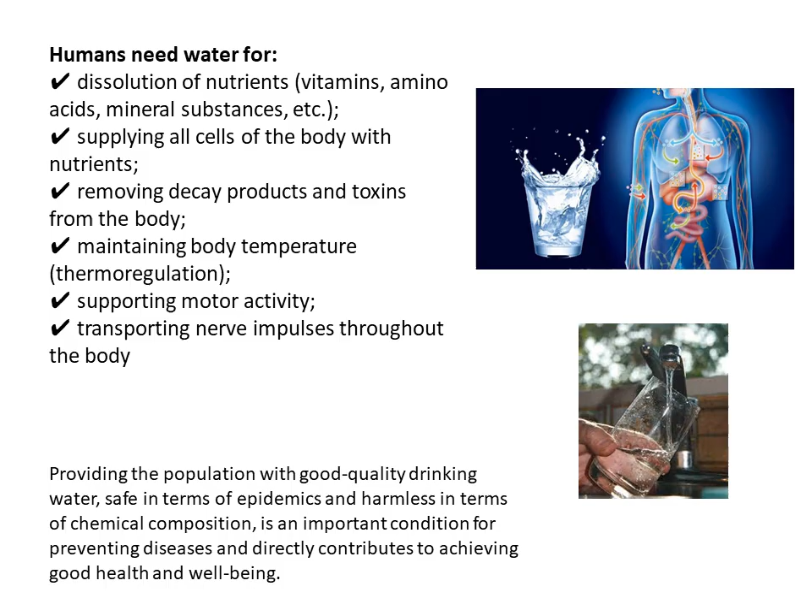Providing the population with good quality drinking water, safe in terms of epidemics and harmless in terms of chemical composition, is an important condition for preventing diseases and directly contributes to achieving good health and well-being. There are two types of water supply system, centralized and decentralized.

What does water supply mean? Water supply is a system of organizing the provision of water to the population, industrial, agricultural, and other facilities for various needs. It includes the processes of water abstraction, purification, transportation, and delivery to consumers. Depending on the water sources, water supply can be by centralized water system and decentralized.

Centralized water system means a system of pipes or other distribution devices designed to distribute potable water from treatment facilities to residential or commercial premises. The sources can be rivers, lakes, reservoirs, or wells. Decentralized water system uses local water sources like wells, artesian wells, local water intake facilities.

Centralized water systems use large plants and extensive pipes for big areas, offering economies of scale but high infrastructure cost and vulnerability. Decentralized systems use smaller local treatment units like point-of-use filters or small community plants near the user, providing flexibility, resilience, lower setup cost, and tailored solutions, but require more user involvement for maintenance.

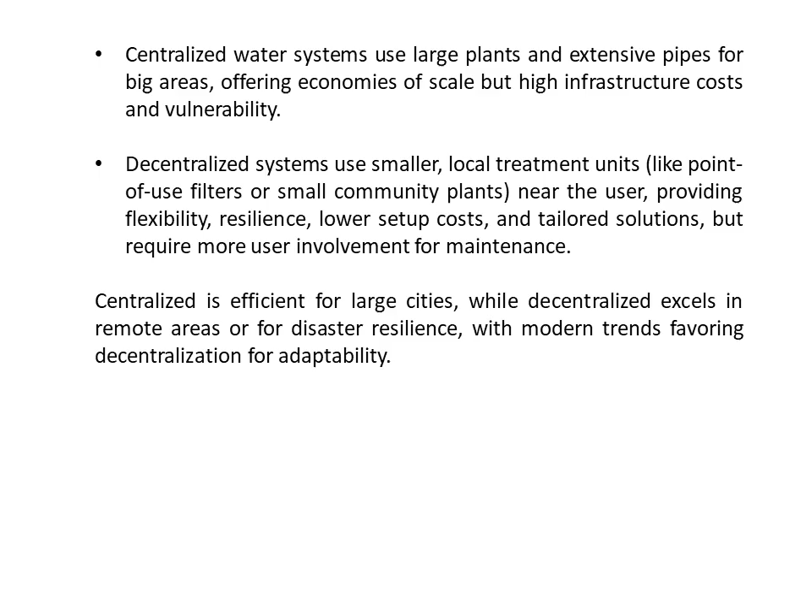Centralized is efficient for large cities, while decentralized excels in remote areas and offers disaster resilience, with the modern trend favoring decentralization for adaptability. Centralized, or by other name public water system or community water system, serves millions of households around the world. However, this system often does not reach the poorest or the most remote populations, and quality and quantity of water provided are often unreliable due to poor operation and maintenance.

Decentralized or private water systems offer the possibility to provide safe drinking water where centralized supply systems are not feasible due to technical, economical, or institutional reasons. For example, in rural communities or informal settlements. Decentralized water supply refers to the small-scale purification and distribution of water.

What about centralized water system? How does it work? A single large treatment plant collects water, purifies it, and distributes it via a vast network of pipes to a large population. There are some advantages of centralized water system. Economies of scale, that means lower cost per volume once built. Consistent quality across a large service area.

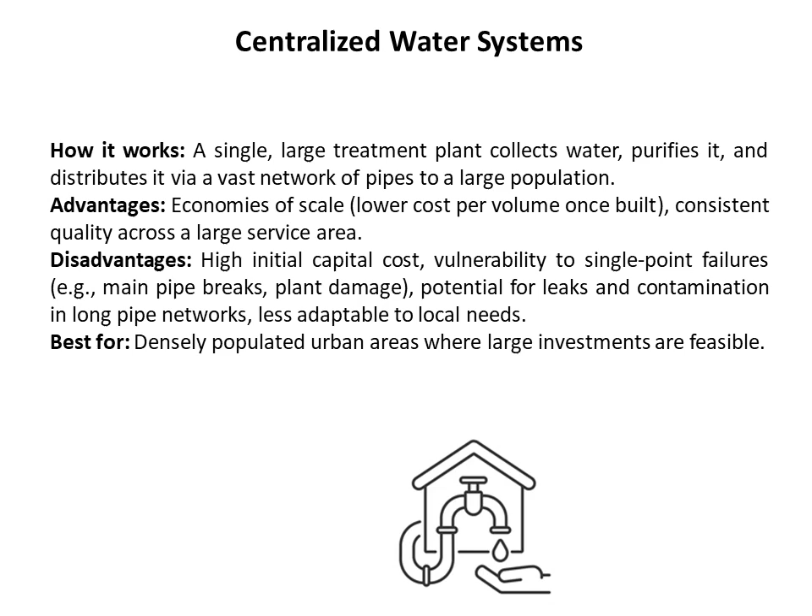But there are also some disadvantages like high initial capital cost, vulnerability to single point failures, potential for leaks and contamination in long pipe networks, and being less adaptable to local needs. It is best for densely populated urban areas where large investments are feasible.

What about decentralized water system? How does it work? Smaller, localized treatment units like point of entry, point of use or small community plants treat water close to where it's needed. Advantages of decentralized water system: lower initial cost, increased resilience, one unit failing doesn't affect the whole system, flexibility, suitability for remote areas, reduced need for extensive piping, and it enables local reuse.

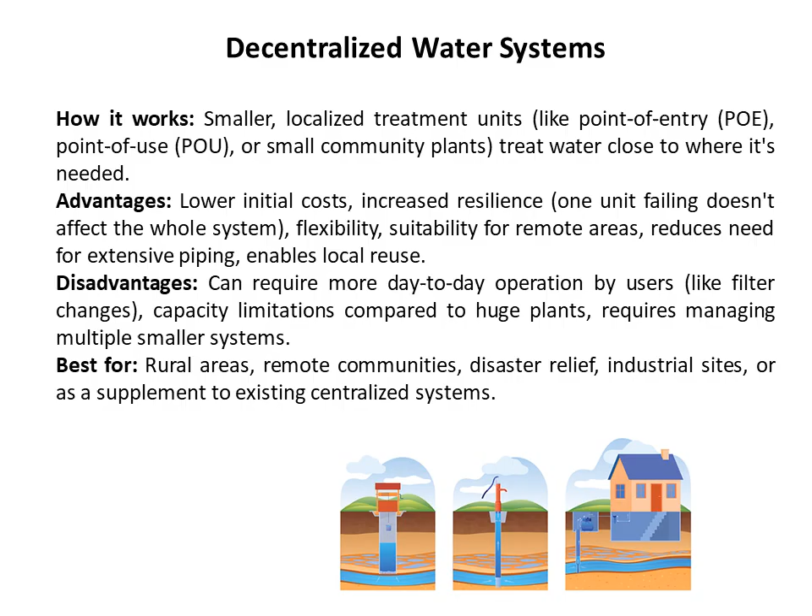Also, there are some disadvantages of decentralized water system. It can require more day-to-day operations by users, like filter changes, capacity limitations compared to huge plants, and requires managing multiple small systems. Best for rural areas, remote communities, disaster relief, industrial sites, or as a supplement to existing centralized systems.

Surface water refers to bodies of water that provide water to public drinking water supplies and private wells. These bodies of water can include rivers, streams, lakes, reservoirs, springs, and water under the ground. Groundwater is located below the surface of the earth in spaces between rock and soil. Surface water collects on the ground or in a stream, river, lake, reservoir, or ocean.

Surface water and groundwater are both important sources for community water supply needs. Groundwater is a common source for single homes and small towns, and rivers and lakes are the usual sources for large cities. Also, approximately 98% of liquid fresh water exists as groundwater, much of it occurs very deep. This makes pumping very expensive, preventing the full development and use of all groundwater resources.

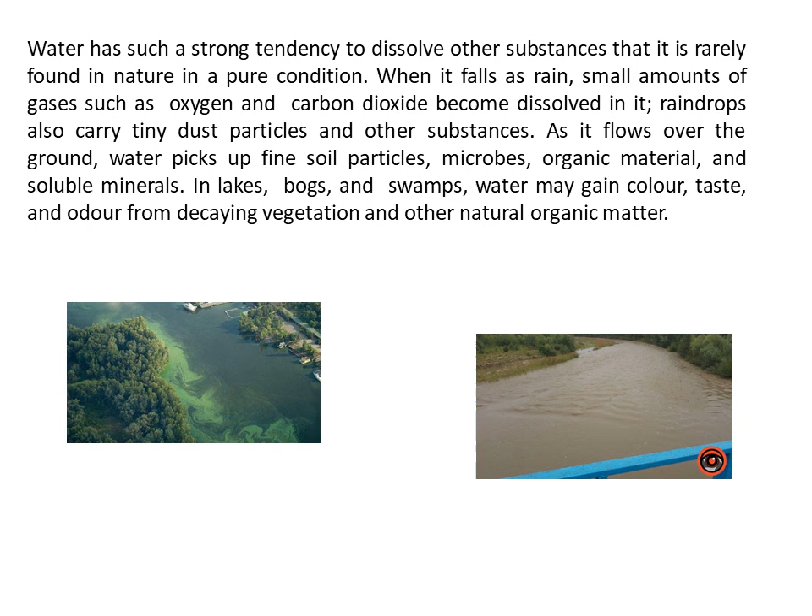In lakes, bogs, and swamps, water may gain color, taste, and odor from decaying vegetation and other natural organic matter. On this slide you can see how a local river or lake presents different pollution. Groundwater usually acquires more dissolved minerals than does surface runoff because of its long direct contact with the soil and rocks. It may also absorb gases such as hydrogen sulfide and methane.

In populated areas, the quality of surface water as well as groundwater is directly influenced by land use and by human activities. For example, storm water runoff contaminated with agricultural or lawn pesticides and fertilizers, as well as with road deicing chemicals or motor oils, can flow into streams and lakes. In addition, effluent from malfunctioning septic tanks and subsurface leaching fields can seep into groundwater.

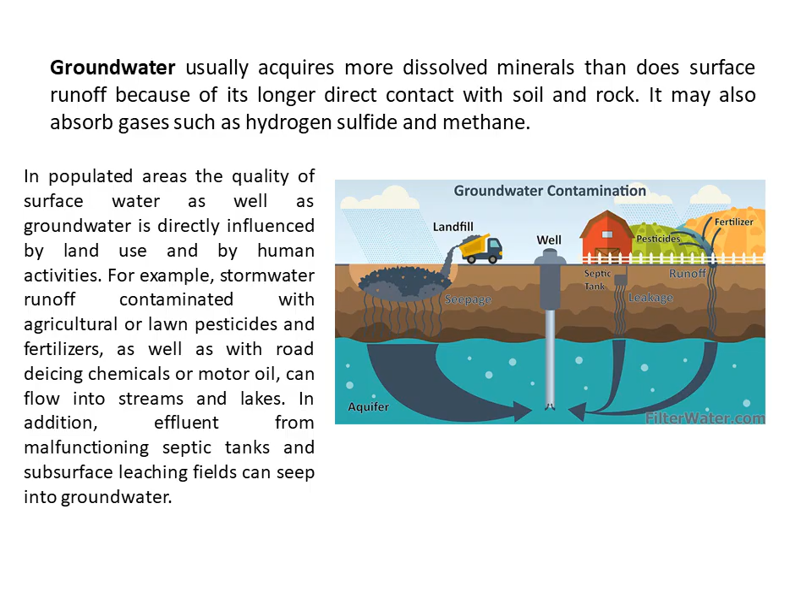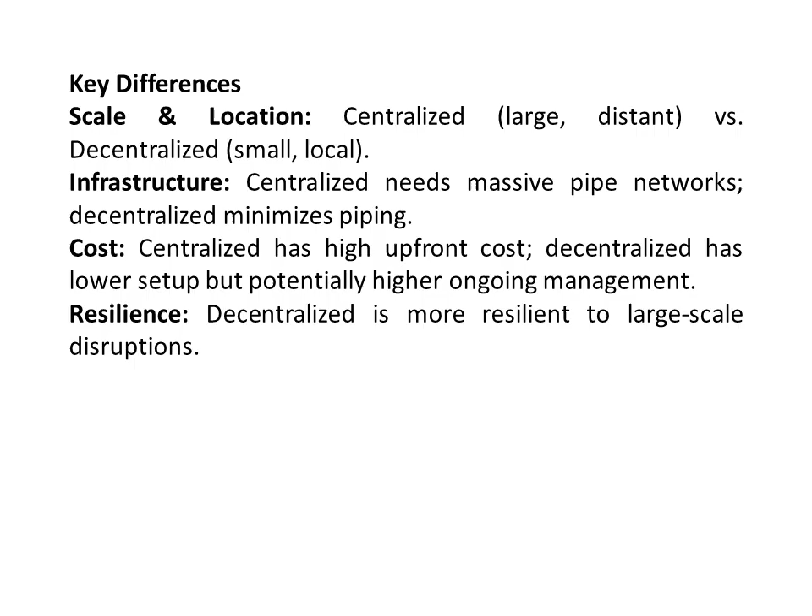Key differences: scale and location. Centralized, large, distant, vs. decentralized, small local. Infrastructure: centralized needs a massive pipe network, decentralized minimizes piping. A disadvantage of centralized is its high upfront cost. Decentralized has lower setup but potentially higher ongoing management. Resilience: decentralized is more resilient to large-scale disruptions.

Some groundwater needs filtration, which removes sediments and particles. Other groundwater needs aeration, which eliminates dissolved gases like hydrogen sulfide. Other water may need softening, which can reduce hardness caused by minerals like calcium and magnesium. All groundwater needs disinfection, which can kill bacteria and viruses by different methods with the help of chlorine, ultraviolet, or ozone. Sometimes water needs removal of arsenic, nitrates, or fluoride if present in excess amounts.

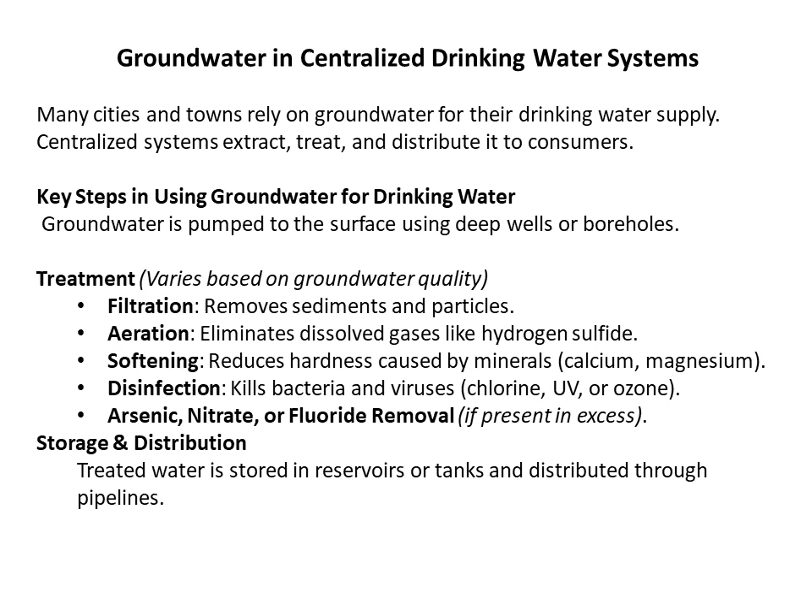Storage and distribution for groundwater are next. Treated water is stored in special reservoirs or tanks and distributed through pipelines. Advantages of using groundwater: it is usually cleaner than surface water, as it is protected from direct pollution, and less affected by seasonal variations. Groundwater requires less treatment compared to surface water, and groundwater is naturally filtered through soil and rocks.

But there are also some challenges and risks for groundwater. Over-extraction can deplete aquifers. Contamination from human activity, for example, industrial waste, pesticides, and septic systems, can also be in groundwater. Salinity and hardness in some areas can be very high. And groundwater has a slow recharge rate, making it a finite resource if not managed properly.

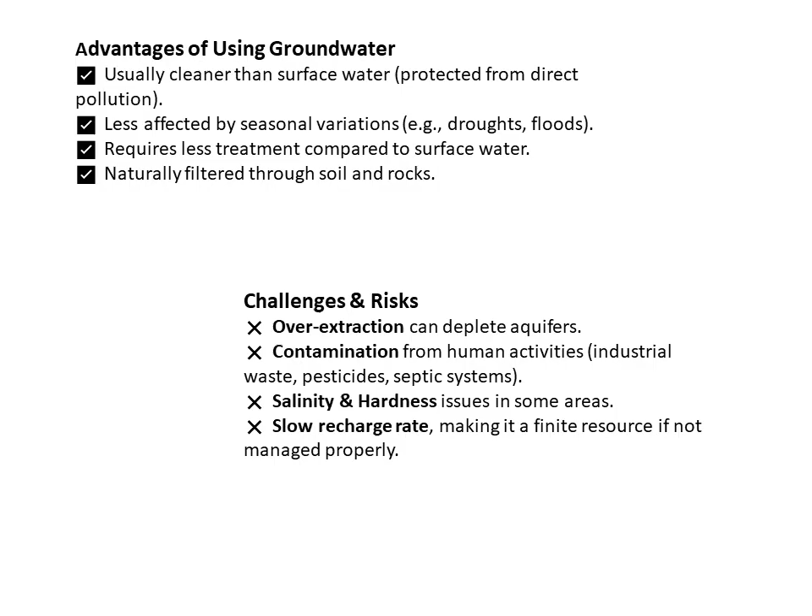Before fresh water can be considered potable, it must be treated to be made safe for drinking. Municipal water supply systems include facilities for storage, transmission, treatment, and distribution. The design of these facilities depends on the quality of the water, on the particular needs of the user or consumer, and on the quantities of water that must be processed.

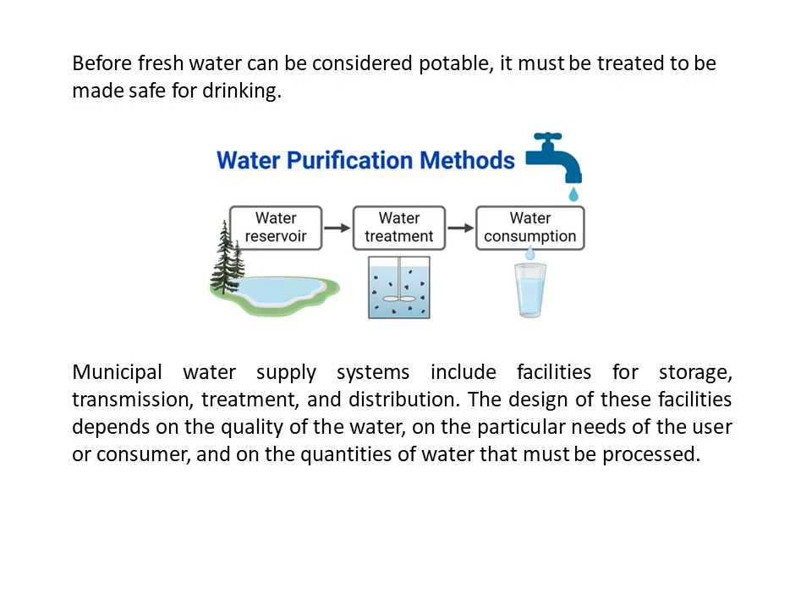Key components of a centralized drinking water system are next. For water treatment, the following methods are used: coagulation and flocculation, which help to remove large particles; sedimentation, which helps settle heavy particles; filtration, which removes small contaminants; and disinfection, which kills bacteria and viruses with the help of chlorination or ultraviolet treatment. On this scheme you can see all these main steps for water treatment.

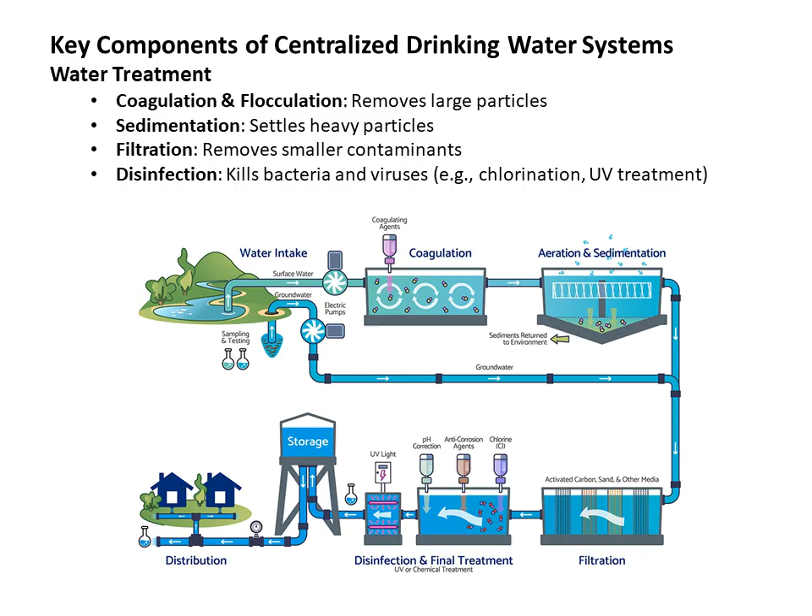Advantages of centralized water systems are: consistent water quality, compliance with health and safety standards, efficient large-scale distribution, better control and monitoring, regular water quality testing, and lower long-term cost per household. Challenges of centralized water systems are high initial infrastructure cost, maintenance and contamination risk, and dependence on a single source, which may be vulnerable to droughts or pollution.

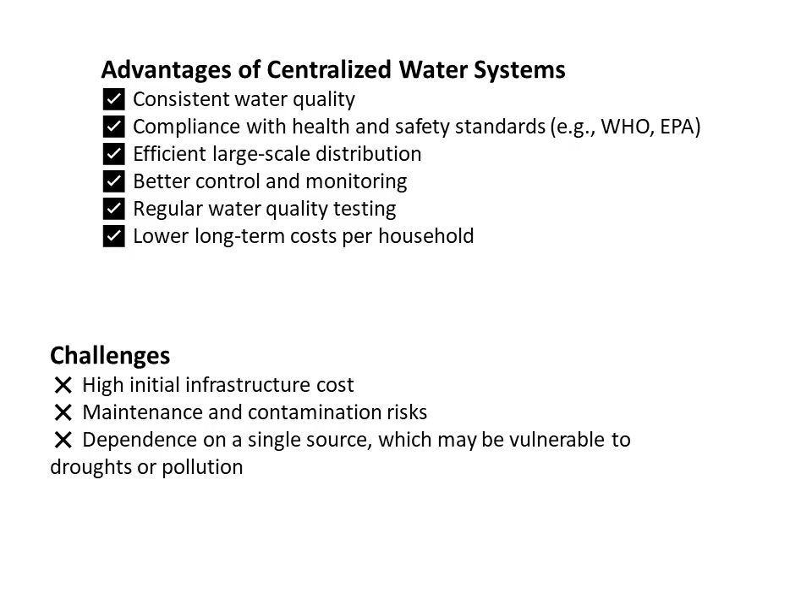We always should remember about drinking water quality. Water quality standards set limits on the concentration of impurities allowed in water. Standards also affect the selection of raw water sources and the choice of treatment processes. All water which people drink should correspond to special water quality standards.

Water in rivers or lakes is rarely clean enough for human consumption if it is not first treated or purified. Groundwater, too, often needs some level of treatment to render it potable. The primary objective of water treatment is to protect the health of the community.

Potable water must, of course, be free of harmful microorganisms and chemicals, but public supplies should also be aesthetically desirable so that consumers will not be tempted to use water from other, more attractive but unprotected sources. The water should be crystal clear, with almost no turbidity, and it should be free of objectionable color, odor, and

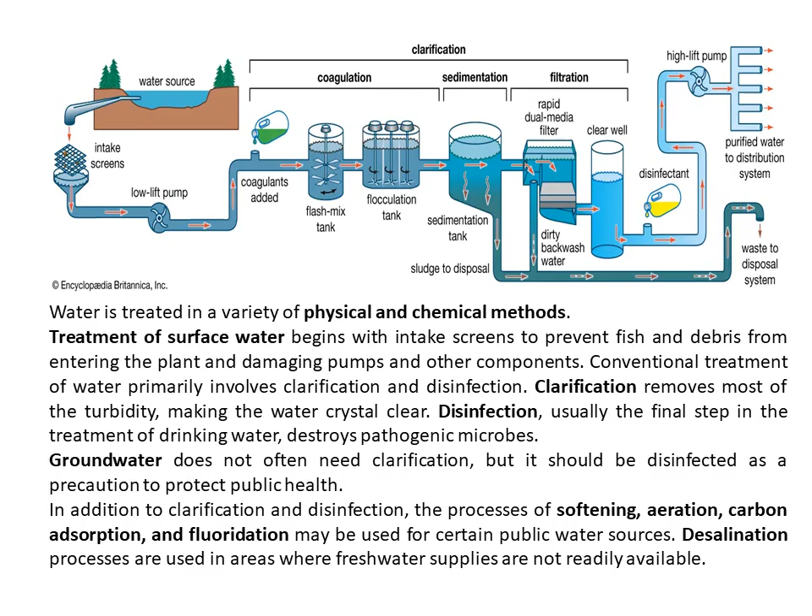In addition to clarification and disinfection, the processes of softening, aeration, carbon adsorption and fluoridation may be used for certain public water sources. Not always, only some water needs these additional processes. A little later I will explain when and why. Desalination processes are used in areas where fresh water supplies are not readily available.

Here you can see how water from the river or lake looks. The water is not transparent. That means the water has high turbidity. What is turbidity? Turbidity refers to cloudiness caused by very small particles of silt, clay, and other substances suspended in water. Even a slight degree of turbidity in water is objectionable to most people. Turbidity also interferes with disinfection by creating possible shields for pathogenic organisms.

Groundwater normally has very low turbidity because of the natural filtration that occurs as it percolates through the soil. Surface waters are often high in turbidity. Coagulation is often the first step in water treatment. Treatment plant staff add chemicals to the water that help bind together dirt and other small particles. The chemicals they commonly use include specific types of salt, aluminium or iron.

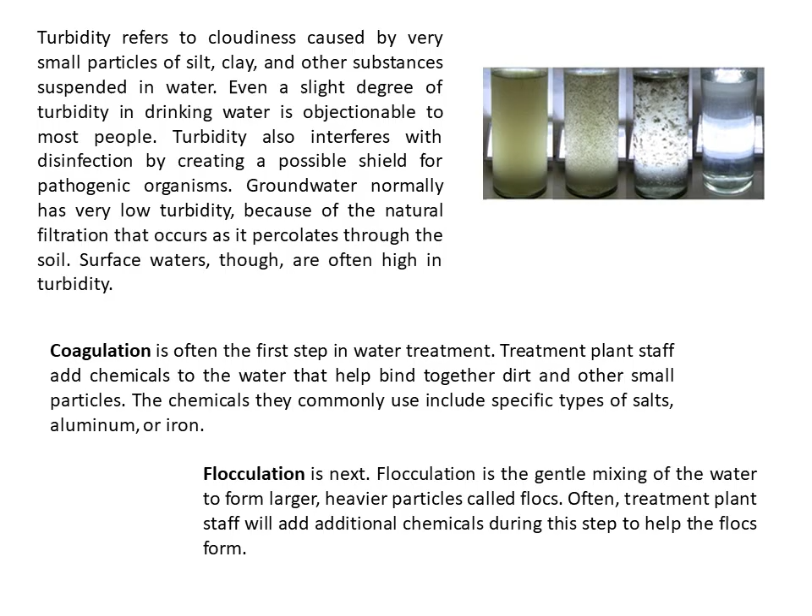Coagulation and flocculation. Suspended particles cannot be removed completely by plain settling. Large, heavy particles settle out readily, but smaller and lighter particles settle very slowly, or in some cases do not settle at all. Because of this, the sedimentation step is usually preceded by a chemical process known as coagulation. Chemicals, known as coagulants, are added to the water to bring the nonsettling particles together into larger, heavier masses of solid called floc.

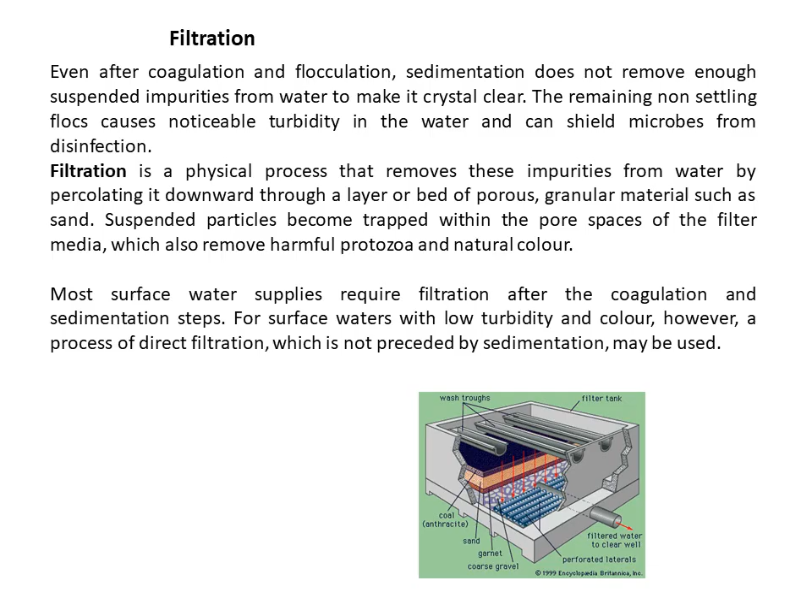Most surface water supplies require filtration after the coagulation and sedimentation steps. For surface water with low turbidity and color, however, a process of direct filtration which is not preceded by sedimentation may be used. On this slide you can see a scheme of a sand filter which is used for water filtration. Two types of sand filter are in use: slow and rapid. Slow filters require much more surface area than rapid filters and are difficult to clean. Most modern water treatment plants now use rapid dual media filters following coagulation and sedimentation.

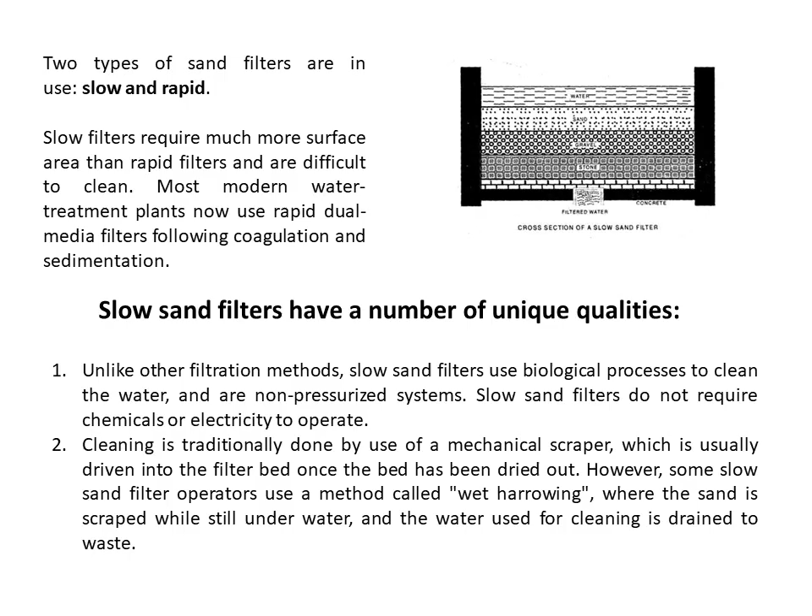Cleaning is traditionally done by use of a mechanical scraper, which is usually driven into the filter bed once the bed has been dried out. However, some slow sand filter operators use a method called wet harrowing, where the sand is scraped while still underwater and the water used for cleaning is drained to waste. For municipal systems, there usually is a certain degree of redundancy since it is desirable for the required throughput of water to be achievable with one or more beds out of service.

Slow sand filters require relatively low turbidity levels to operate efficiently. In summer conditions with high microbial activity and in conditions where the raw water is turbid, blinding of the filters due to bioclogging occurs more quickly and pre-treatment is recommended. Unlike other water filtration technologies that produce water on demand, slow sand filters produce water at a slow, constant flow rate and are usually used in conjunction with a storage tank for peak usage. This slow rate is necessary for healthy development of the biological processes in the filter. Due to the low filtration rate, slow sand filters require extensive land area for a large municipal system.

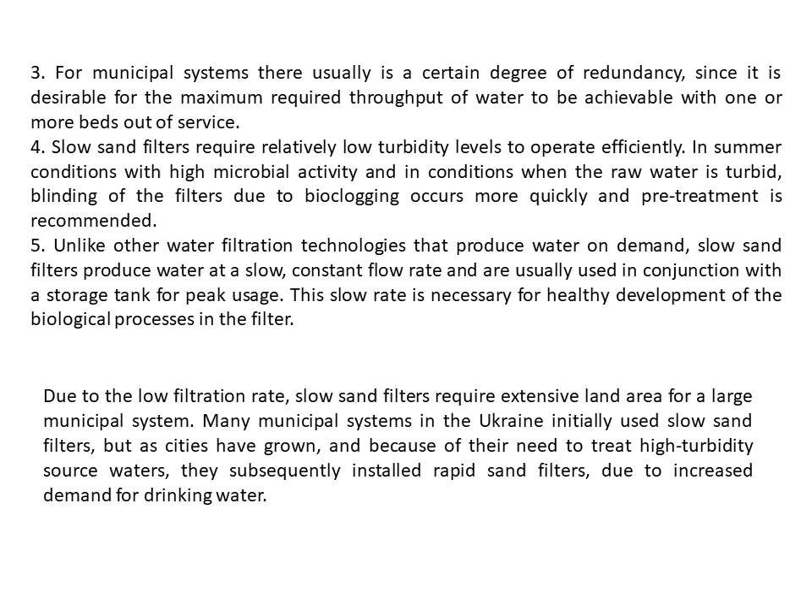Many municipal systems in Ukraine initially used slow sand filters, but as cities have grown and because of their need to treat high turbidity sources of water, they subsequently installed rapid sand filters due to increased demand for drinking water. The rapid sand filter or rapid gravity filter is a type of filter used in water purification and is commonly used in municipal drinking water facilities as part of a multiple-stage treatment system. These systems are complex and expensive to operate and maintain and therefore less suitable for small communities and developing nations.

A rapid sand filter is a key component in municipal water treatment, using layers of sand and gravel to quickly remove suspended particles and turbidity from water, but it needs pre-treatment like coagulation, flocculation, and post-treatment disinfection to produce safe drinking water.

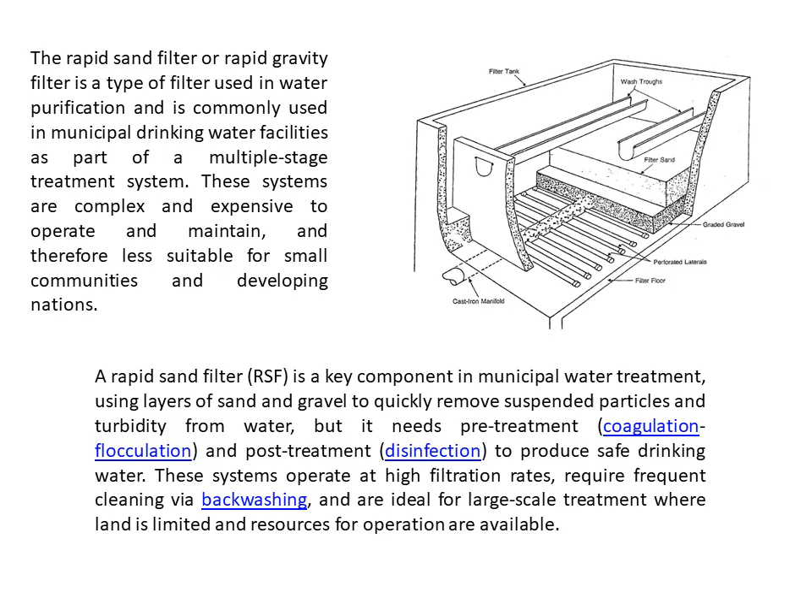This system operates at high filtration rates, requires frequent cleaning by backwashing, another method of cleaning in opposite to the previous filter, which is named backwashing, and is ideal for large-scale treatment where land is limited and resources for operating are available. Here you can see a scheme of a rapid sand filter.

The most important microbiological measure of drinking water quality is a group of bacteria called coliforms. Coliform bacteria normally are not pathogenic, but they are always present in the intestinal tract of humans and are excreted in very large numbers with human waste. To remove bacteria from drinking water, a method named disinfection should be used. Disinfection destroys pathogenic bacteria and is essential to prevent the spread of waterborne disease.

Typically the final process in drinking water treatment, it is accomplished by applying either chlorine or chlorine compounds, ozone, or ultraviolet radiation to clarified water. Short about chlorination. The addition of chlorine or chlorine compounds to drinking water is called chlorination. Chlorine compounds may be applied in liquid and solid forms, for instance liquid sodium hypochlorite or calcium hypochlorite in tablet or granular forms. However, the direct application of gaseous chlorine from pressurized steel containers is usually the most economical method for disinfecting large volumes of water.

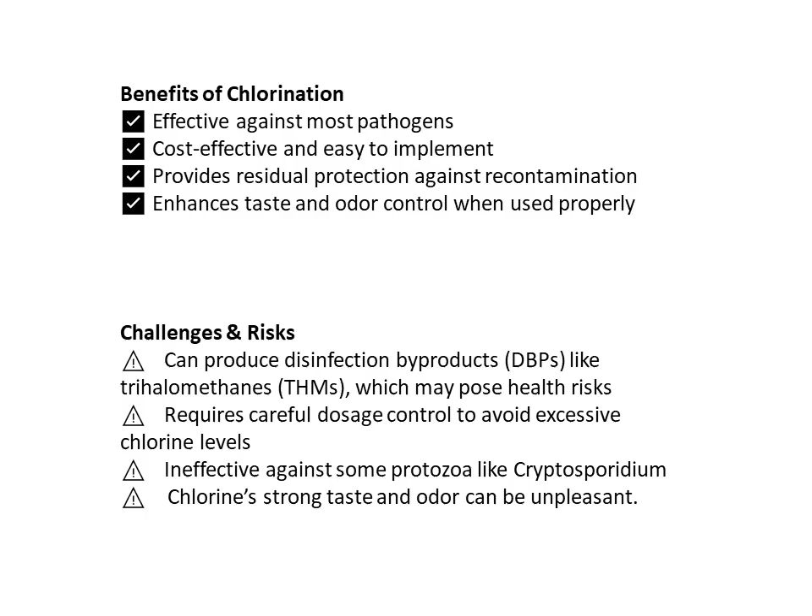Another method of water disinfection uses ozone; the name of this method is ozonization. Ozone gas may be used for disinfection of drinking water. However, since ozone is unstable, it cannot be stored and must be produced on site, making the process more expensive than chlorination. Ozone has the advantage of not causing taste or odor problems. It leaves no residual in the disinfected water. The lack of an ozone residual, however, makes it difficult to monitor its continued effectiveness as water flows through the distribution system.

Another method of water disinfection uses ultraviolet rays. Ultraviolet radiation destroys pathogens, and its use as a disinfecting agent eliminates the need to handle chemicals. It leaves no residual and it does not cause taste or odor problems, but the high cost of its application makes it a poor competitor with either chlorine or ozone as a disinfectant.

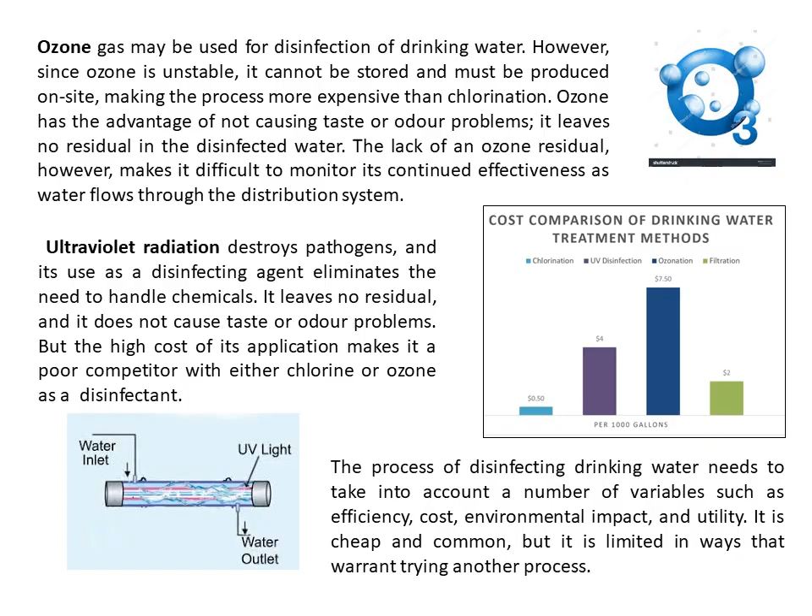Additional treatment. Additional treatment is used for some water which needs additional purification or has some contamination which needs this additional treatment. Begin from color, taste and odor. Color, taste and odor are physical characteristics of drinking water that are important for aesthetic reasons rather than health reasons. Color in water may be caused by decaying leaves or by algae, giving it a brownish yellow hue. Taste and odor may be caused by naturally occurring dissolved organics or gases. Some well water supplies, for example, have a rotten eggs odor that is caused by hydrogen sulfide gas.

Chemical impurities associated with the aesthetic quality of drinking water include iron, manganese, copper, zinc and chloride, which can change water color or water taste. Dissolved metals impart a bitter taste to water and may stain laundry and plumbing fixtures. Excessive chlorides give the water an objectionable salty taste. To remove color, taste or odor of the water, some methods should be used. First of all, the method named aeration.

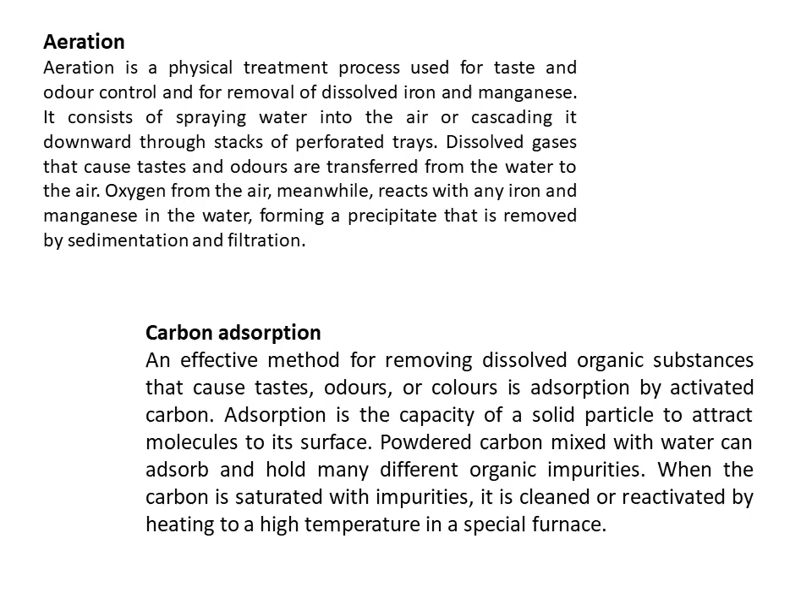Adsorption is the capacity of a solid particle to attract molecules to its surface. Powdered carbon mixed with water can adsorb and hold many different organic impurities. When the carbon is saturated with impurities, it is cleaned or reactivated by heating to a high temperature in a special furnace.

Another parameter of water quality is hardness. This is a term used to describe the effect of dissolved minerals, mostly calcium and magnesium. Minerals cause deposits of scale in hot water pipes, and they also interfere with the lathering action of soap. Hard water does not harm human health, but the economic problems it causes make it objectionable to most people. Here you can see how hard water looks in the heater system.

To remove water hardness, special treatment methods should be used, called water softening. Softening is the process of removing the dissolved calcium and magnesium salts that cause hardness in water. It is achieved either by adding chemicals that form insoluble precipitates or by ion exchange. Chemicals used for softening include calcium hydroxide, slaked lime, and sodium carbonate, soda ash. The lime-soda methods of water softening must be followed by sedimentation and filtration in order to remove the precipitates.

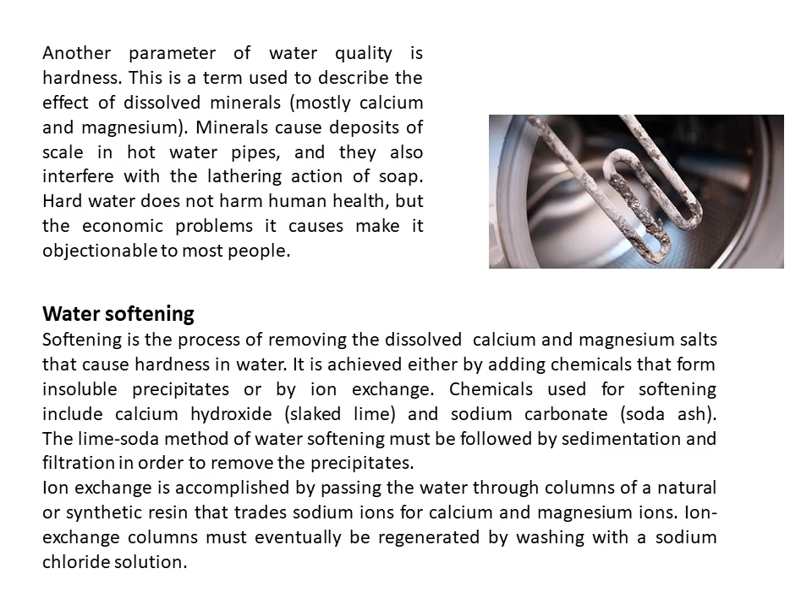Fluoridation. This method is used when water has a low amount of fluorine. Many communities reduce the incidence of tooth decay in young children by adding sodium fluoride or other fluorine compounds to filtered water. The dosage of fluoride must be carefully controlled. Low concentrations are beneficial and cause no harmful side effects, but very high concentrations of fluoride may cause discoloration of tooth enamel. On the first slide you can see what tooth decay looks like due to low fluoride in the drinking water.

Defluoridation, in opposite to fluoridation, is a downward adjustment of the level of fluoride in drinking water. Worldwide, fluoride is one of the most abundant anions present in groundwater. The defluoridation process is based on the principle of electrolysis using aluminium plate electrodes placed in the raw water containing excess fluoride. During the electrolysis, the anode gets ionized and fluoride is removed by complex formation, adsorption, precipitation, coagulation and settling.

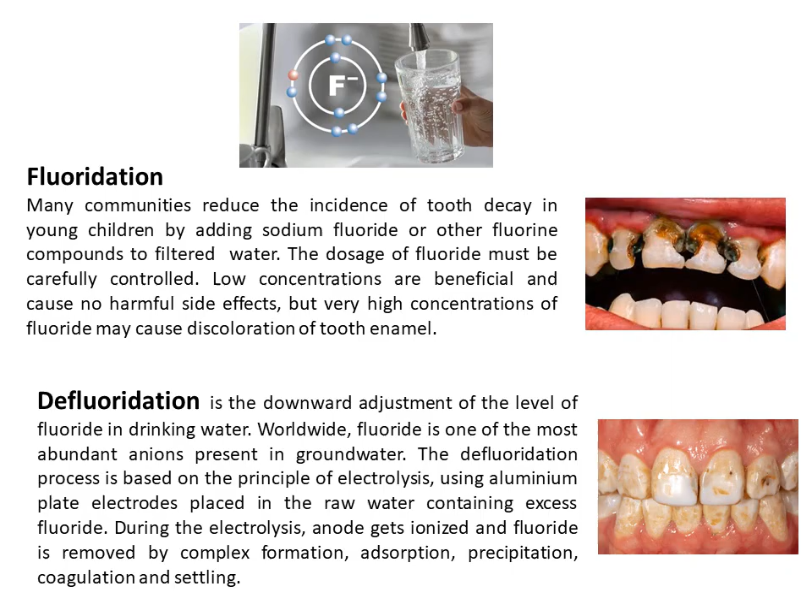On the second photo you can see the teeth of a person who drinks water with a high level of fluoride. This problem is named dental fluorosis.

Desalination or desalting is the separation of fresh water from salt water or brackish water. Major advances in desalination technology have taken place since the 1950s as the need for supplies of fresh water has grown in arid and densely populated areas of the world. Desalted water is the main source of municipal supplies in areas of the Caribbean, the Middle East, and North Africa, and its use is increasing in the southeastern United States. Although it is relatively expensive to produce, desalted water can be more economical than the alternative of transporting large quantities of fresh water over long distances.

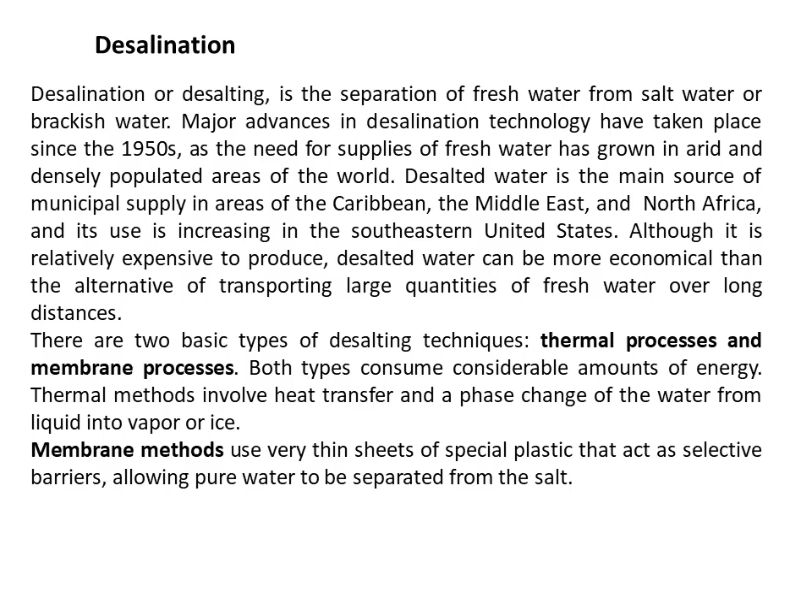There are two basic types of desalting technologies: thermal processes and membrane processes. Both types consume considerable amounts of energy. Thermal methods involve heat transfer and a phase change of water from liquid into vapor or ice. Membrane methods use very thin sheets of special plastic that act as selective barriers, allowing pure water to be separated from the salt.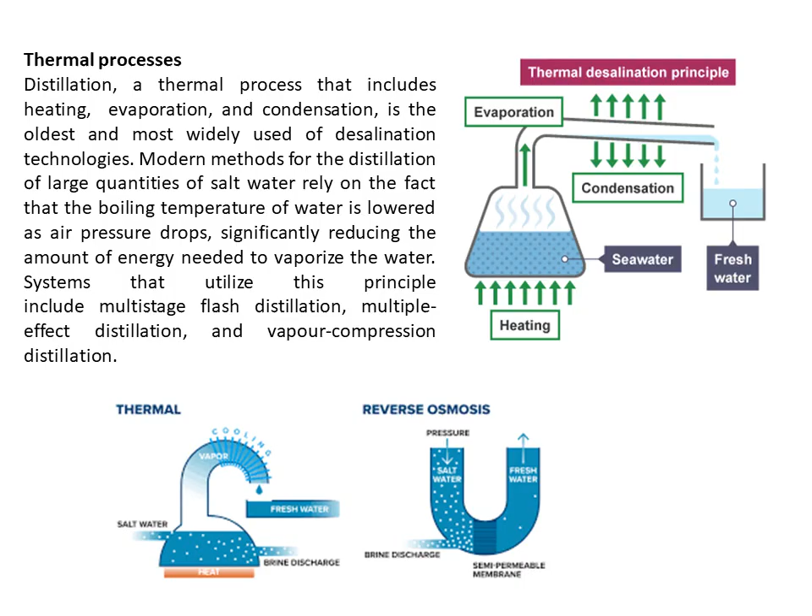Systems that utilize this principle include multi-stage flash distillation, multi-effect distillation, and vapor compression distillation. At the bottom of this slide you can see a scheme of reverse osmosis, which also helps to remove different ions, different salts from the water and make fresh water.

Now we will talk about water sources for private systems, or another name, decentralized water supply systems. If people do not get water from a public water system, they most likely have a private groundwater well. Groundwater is naturally filtrated, which might remove some germs and chemicals. How much is filtrated out depends on how far the water is below ground and the area's local geology.

Groundwater is water stored beneath the Earth's surface in aquifers, natural underground reservoirs of permeable rocks or soil that hold and transmit water. It is accessed through wells and springs and serves as a major source of drinking water worldwide. Well water is generally very safe, and the minerals present make for healthy and tasty water.

Typically, groundwater is naturally clean and safe to drink. Because the soil on top acts as a filter, groundwater is usually free of microorganisms that may cause disease. However, groundwater can become contaminated if the casings or caps for the well are not installed in the correct way. Groundwater may or may not be a safe water source.

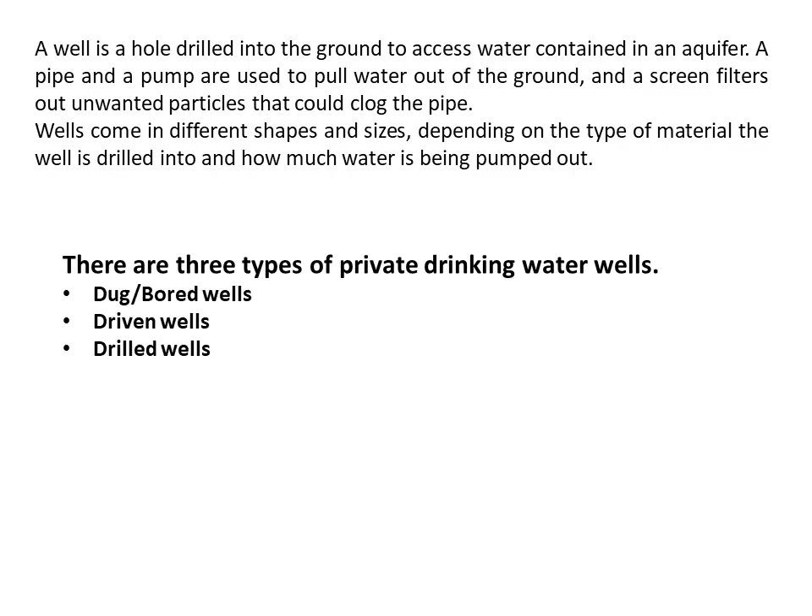A well is a hole drilled into the ground to access water contained in an aquifer. A pipe and a pump are used to pull water out of the ground, and a screen filters out unwanted particles that could clog the pipes. Wells come in different shapes and sizes depending on the type of materials the well is drilled into and how much water is being pumped out. There are three types of private drinking water wells: dug or bored wells, driven wells, and drilled wells.

Dug wells. Dug wells, also known as shallow wells, are one of the most straightforward and commonly used types of water wells. These wells are manually dug into the ground until they reach the water table, which is typically found within 25 feet. Dug wells are often lined with bricks, stones, or concrete walls to prevent collapse. While these wells are relatively easy to construct and maintain, they are more susceptible to contamination from surface water, making regular testing and treatment essential.

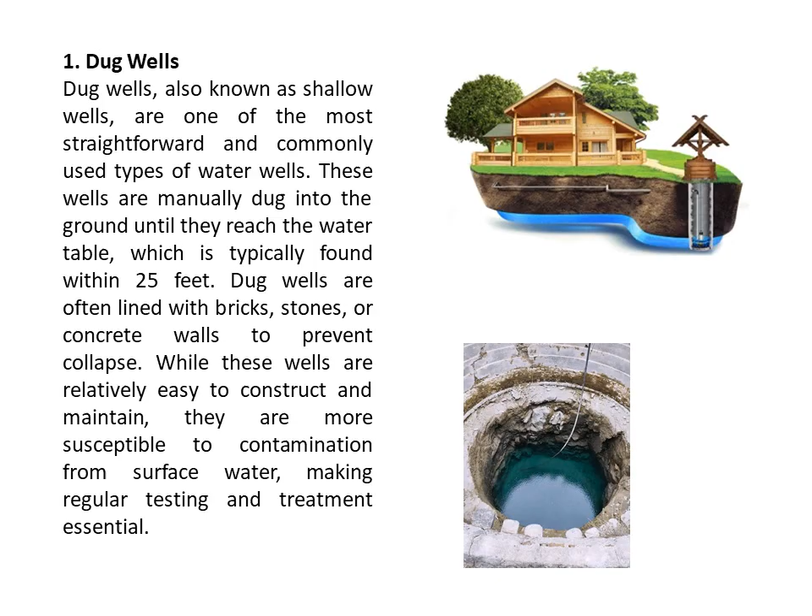Driven wells are similar to dug wells in terms of depth, but are constructed differently. Instead of manual digging, driven wells are created by using a pipe or casing that is forcefully driven into the ground using a heavy hammer or machine. The water is extracted through a shallow well pump installed within the casing. Driven wells are cost effective and can provide access to water within 30 feet. However, they are also vulnerable to contamination and may require continuous monitoring and maintenance.

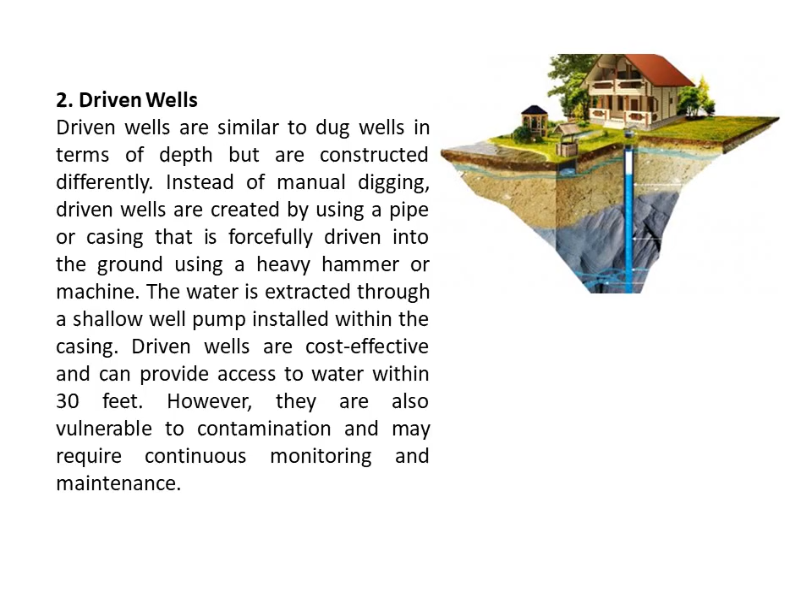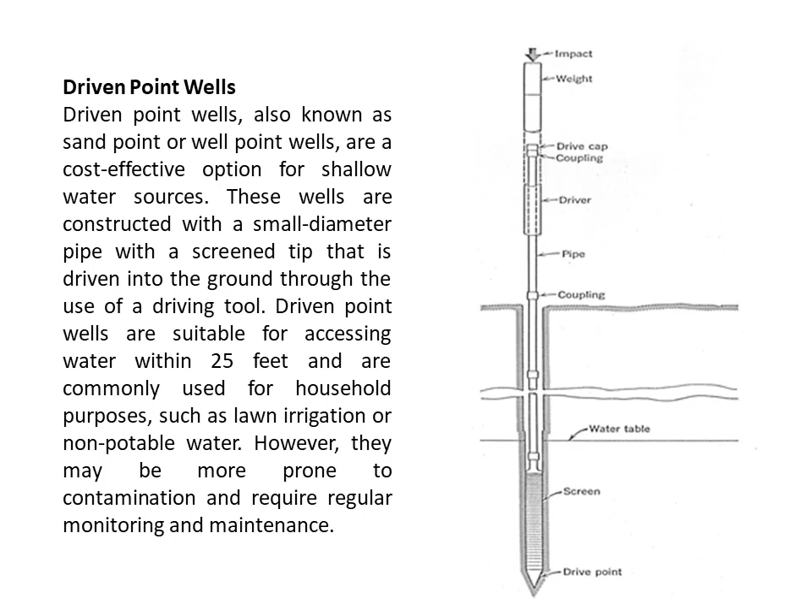Driven point wells, also known as sand point or well point wells, are a cost-effective option for shallow water sources. These wells are constructed with small diameter pipes with a screened tip that is driven into the ground through the use of driving tools. Driven point wells are suitable for accessing water within 25 feet and are commonly used for household purposes such as lawn irrigation or non-potable water. However, they may be more prone to contamination and require regular monitoring and maintenance.

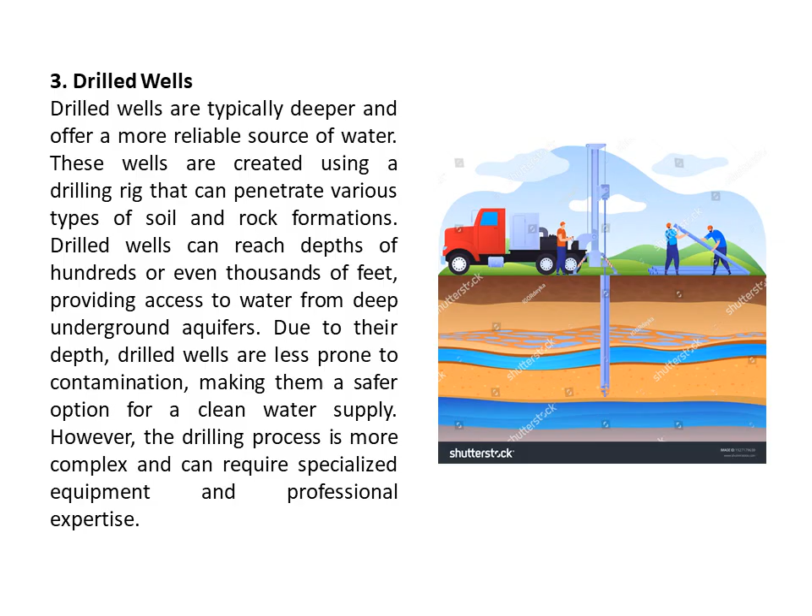And the third type of well is named drilled wells. Drilled wells are typically deeper and offer a more reliable source of water. These wells are created using drilling rigs that can penetrate various types of soil and rock formations. Drilled wells can reach depths of hundreds or even thousands of feet, providing access to water from deep underground aquifers. Due to their depth, drilled wells are less prone to contamination, making them a safer option for a clean water supply. However, the drilling process is more complex and can require specialized equipment and professional expertise.

Protection of well water from pollution and contamination is very important information. Before and during water source development, care should be taken to minimize possible risk. The well should be located on a higher level than possible sources of contaminants such as latrines and cesspits, a pit for collection of waste matter and water, especially sewage. This is because the liquid from the pit may seep into the surrounding ground and into the groundwater.

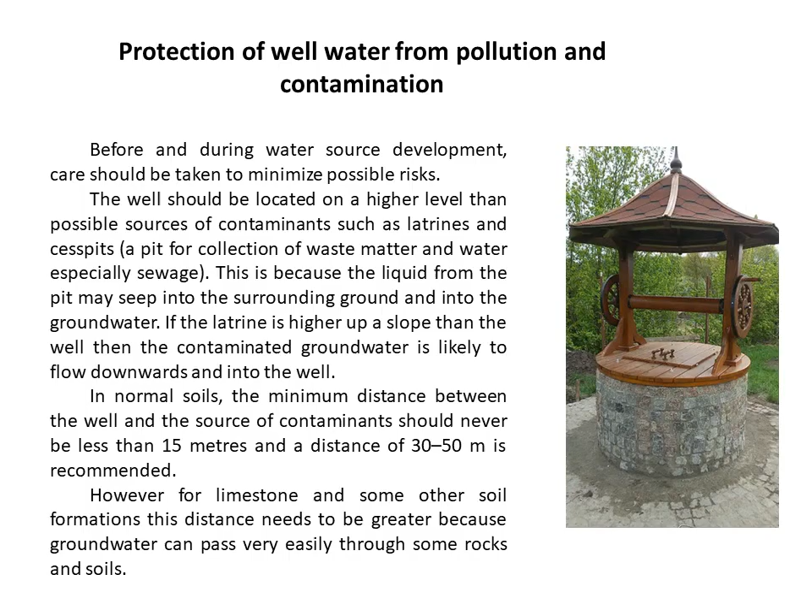If the latrine is higher up a slope than the well, then the contaminated groundwater is likely to flow downwards and into the well. In normal soil, the minimum distance between the well and the sources of contaminants should never be less than 15 meters, and a distance of 30 to 50 meters is recommended. However, for limestone and some other soil formations, this distance needs to be greater because groundwater can pass very easily through some rocks and soils. The inside wall of the well should be made waterproof by constructing a well casing.

As noted above, in smaller diameter bored wells the casing can be a pipe, but in larger wells the casing needs to be constructed by cementing from the top of the well down to a minimum depth of 3 meters. The casing of the well should also be extended for a minimum of 60 centimeters above the surrounding ground level to prevent the entrance of surface runoff. A concrete cover should be fitted over the casing to prevent dust, insects, small animals, and any other contaminants.

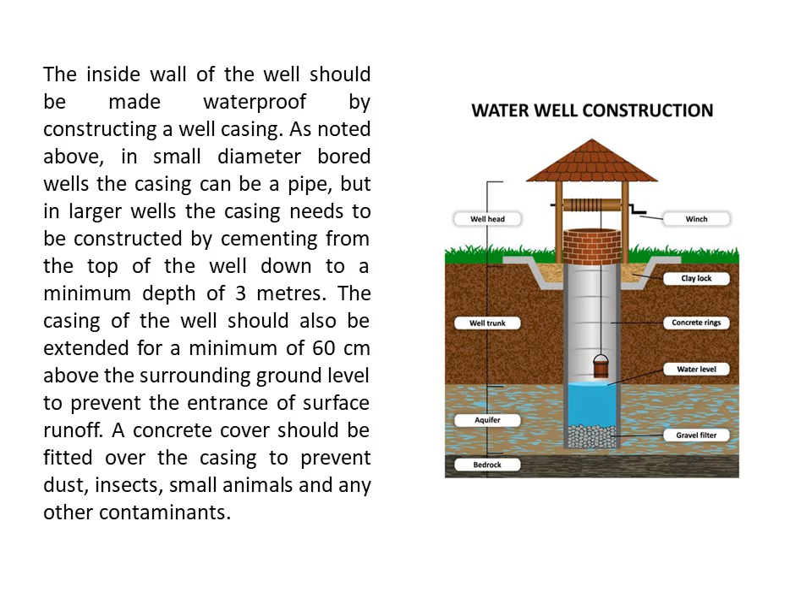On this slide you can see the main equipment of sanitary water well construction. You can see that any well must have waterproof walls. Any well needs a special clay seal around it, and must have special buckets to take water from the well. A pump should be installed, but if a pump is not available, then a sanitary bucket and rope system may be used.

The immediate area of the well should preferably be fenced to keep animals away. The area surrounding the well should be graded. It should slope away from the well in order to prevent the flow of storm water into the well.

There are many potential sources of well water contamination. Natural sources include minerals in the soil or rocks the well is drilled into, as well as runoff from agricultural fields or animal manure. In addition, man-made contamination can come from septic tank leaks, stormwater runoff, or leaking underground storage tanks. There are several other potential causes of well water contamination. Some of the most common causes include bacteria, chemicals, minerals, and radiation.

What about bacteria? Bacteria are the most common cause of well water contamination. Bacteria can enter the water supply through contaminated rainwater, sewage, or agricultural runoff. Chemicals can enter the water supply through industrial waste, agriculture, or even household cleaning products. Minerals can enter the water supply through naturally occurring sources such as rocks and soil. Radiation can enter the water supply through various sources such as nuclear power plants or radioactive waste.

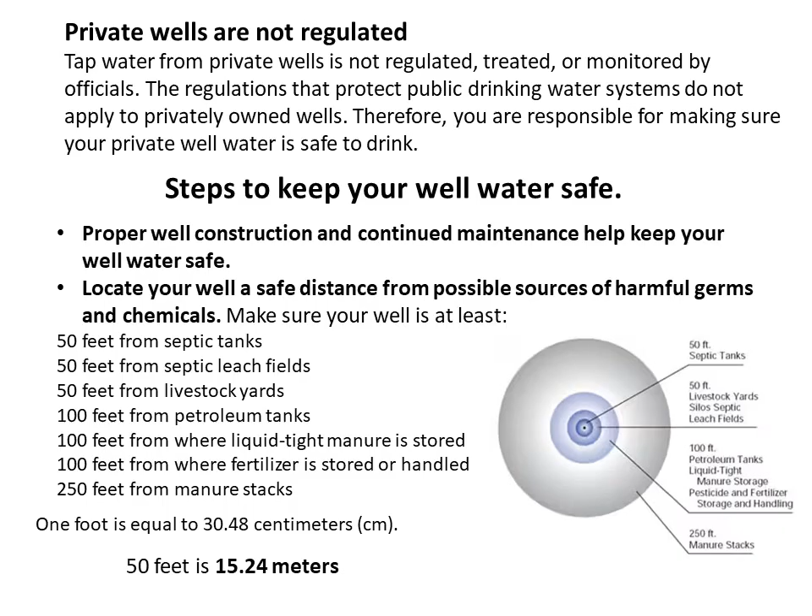Make sure your well is at least 100 feet from petroleum tanks, from where liquid-tight manure is stored, and from where fertilizer is stored or handled. And make sure your well is at least 250 feet from manure stacks. 1 foot is equal to 30.48 centimeters. That means 50 feet is nearly 15.24 meters.

Advantages of the well. Wells have the following advantages. Financial benefits: no water bills. After the initial installation cost, you eliminate monthly water usage fees, paying only the electricity to run the pumps. And long-term savings: the upfront investment can pay for itself over time through reduced utility costs.

Second advantage of the well: quality and health benefits. Water is naturally filtered through soil and rocks, removing some impurities. This water is rich in minerals; it contains healthy minerals like calcium and magnesium, often lacking in treated city water, enhancing taste and health. These advantages also include that it is untreated by harsh chemicals like chlorine or fluoride, leading to a fresher taste. This water is free of chlorine or other additives.

Third advantage of well water: independence and reliability. It is not affected by municipal water bans or service interruptions during natural disasters. And you can control your own water sources and usage, offering peace of mind. Fourth advantage of well water: environmental and property value.

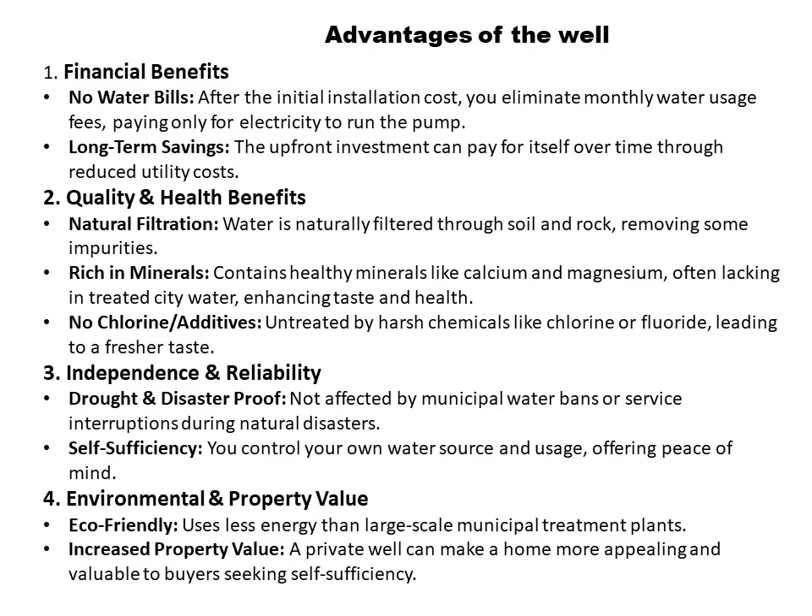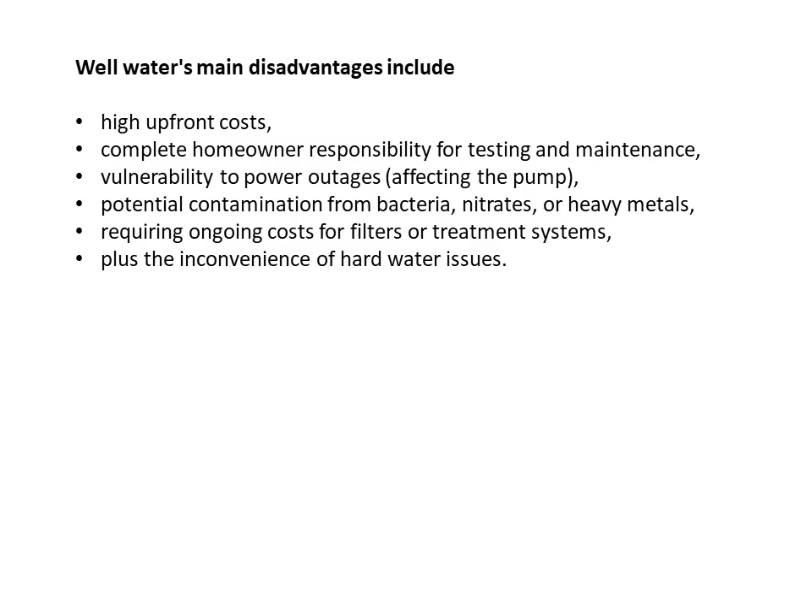Well water's main disadvantages include high upfront cost, complete homeowner responsibility for testing and maintenance, vulnerability to power outages affecting the pump, potential contamination from bacteria, nitrates, or heavy metals, requiring ongoing cost for filters or a treatment system, plus the inconvenience of hard water issues.

I want to again repeat about common well water contamination. Here are a few contaminants that are most commonly found in well water. First of all, heavy metals. Arsenic, copper, chromium, and lead are just a few of the heavy metals that can get into your well water supply via the movements of groundwater, surface water seepage, and runoff. These contaminants wreak havoc on a range of vital organs such as the liver, kidney, and intestines. These metals can also cause cancer.

Pesticides and herbicides. Due to their widespread use in agriculture and industry, pesticides and herbicides end up in well water supplies because of runoff, waste disposal, and spills. These contaminants can cause damage to the kidney and liver as well as the circulatory, nervous, and reproductive systems.

Nitrates and nitrites. These contaminants come from chemical fertilizers, human sewage, and animal waste, and they end up in your well water supply because of groundwater movements, surface water seepage, and runoff.

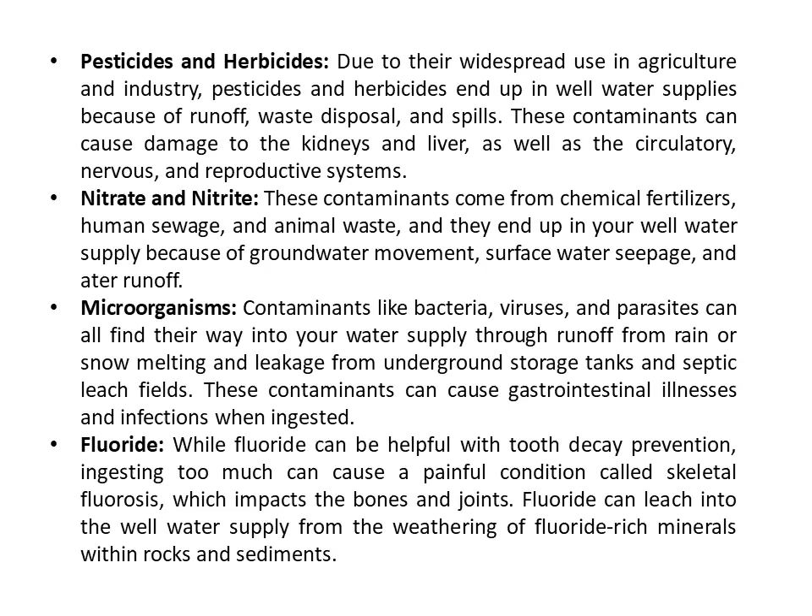What to do if your well water is contaminated? If you think your well water is contaminated, here is a list of steps you can take to address your problem. First of all, stop using water sourced from the well. If you suspect that your well water might be contaminated due to the presence of unusual odor, strange flavors, or stains, the initial and most crucial step is to immediately cease consuming or using the water for drinking, cooking, and other household purposes. Your health and well-being are paramount, and continuing to use potentially contaminated water could expose you and your family to various health risks.

Second step, have the well water tested to identify contaminants. After discontinuing the use of potentially contaminated well water, the next step is to arrange for a test to identify the contaminants. Seeking the expertise of certified water testing professionals is paramount in this phase. The testing process encompasses a wide range of potential pollutants, including bacteria, chemicals, heavy metals, and more.

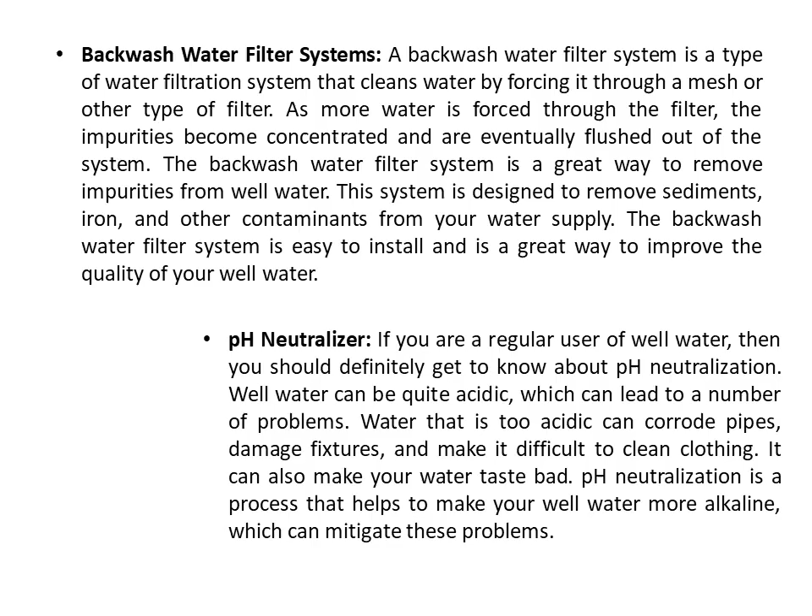pH neutralizer. If you are a regular user of well water, then you should definitely get to know about pH neutralization. Well water can be quite acidic, which can lead to a number of problems. Water that is too acidic can corrode pipes, damage fixtures, and make it difficult to clean clothing. It can also make your water taste bad. pH neutralization is a process that helps to make your well water more alkaline, which can mitigate this problem.

UV disinfection system. UV disinfection is a process that uses ultraviolet light to kill or disinfect microbes or other microorganisms. UV light is a type of electromagnetic radiation that is invisible to the human eye. When this invisible light is applied to water, it kills or inactivates the microorganisms that cause disease. UV disinfection is a proven technology that has been used for over 100 years. It is a safe, effective, and economical way to disinfect well water.

Use water filters. An effective way to make your well water safe is to install water filters in your home. Water filters purify water by filtering out contaminants. There are various types suitable for specific pollutants. Reverse osmosis filters, for example, are best for removing chemicals and metal contaminants. This will also remove sulfur, which makes your water stink like rotten eggs. Ion exchange filters remove hardness minerals like calcium carbonate, while activated carbon filters will effectively eliminate chlorine and other specific organic compounds.

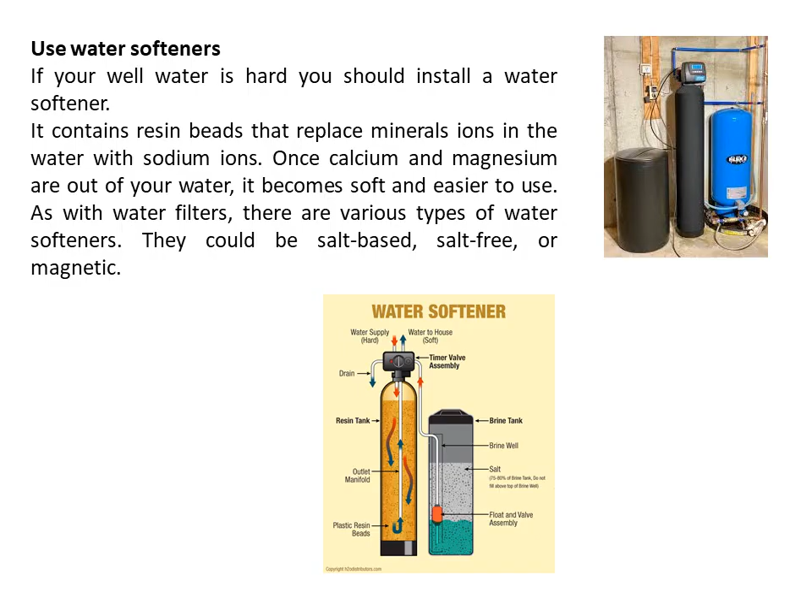If your well water is hard, you should install a water softener. It contains resin beads that replace mineral ions in the water with sodium ions. Once calcium and magnesium are out of your water, it becomes soft and easier to use. As with water filters, there are various types of water softeners. They could be salt-based, salt-free, or magnetic.

Water distillers will help you get rid of over 99% of contaminants in your water. You can bank on them to make your well water safe. Here is how they work. A boiling chamber boils your water at a very high temperature until it vaporizes. As it vaporizes, the water goes into a separate section called the condenser. Metal and chemical contaminants cannot be vaporized, so they stay back in the boiling chamber where they are easily removed.

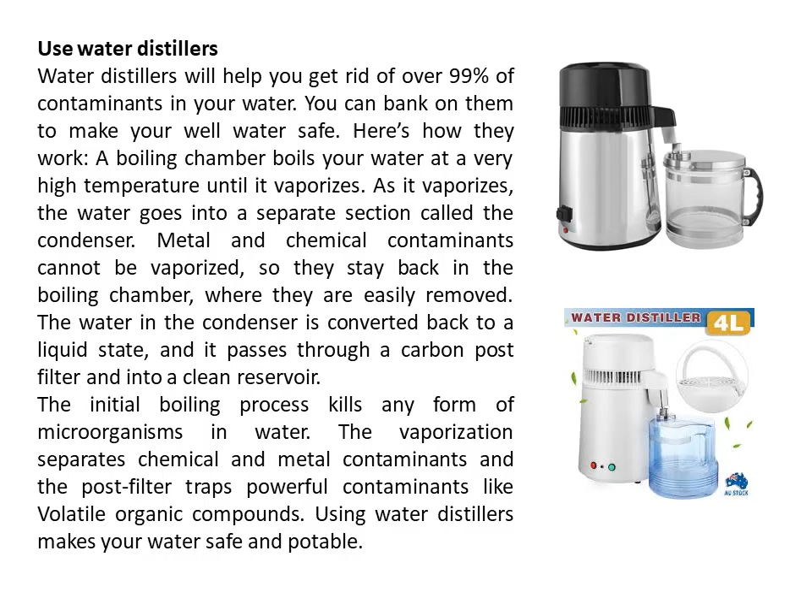The water in the condenser is converted back to a liquid state and it passes through a carbon post filter and into a clean reservoir. The initial boiling process kills any forms of microorganisms in water. The vaporization separates chemicals and metal contaminants, and the post filter traps powerful contaminants like volatile organic compounds. Using water distillers makes your water safe and potable.

Disinfection of wells. When to disinfect wells? After flooding or well damage, whenever the well cap is opened, if water tests positive for bacteria like E. coli or coliforms, and after periods of disuse or long vacations. Disinfecting a well, typically via shock chlorination, involves adding a chlorine solution like unscented bleach to the well after cleaning and flushing, letting it sit for hours to kill pathogens, then running it through all pipes until the chlorine smell is gone, and finally retesting the water for safety.

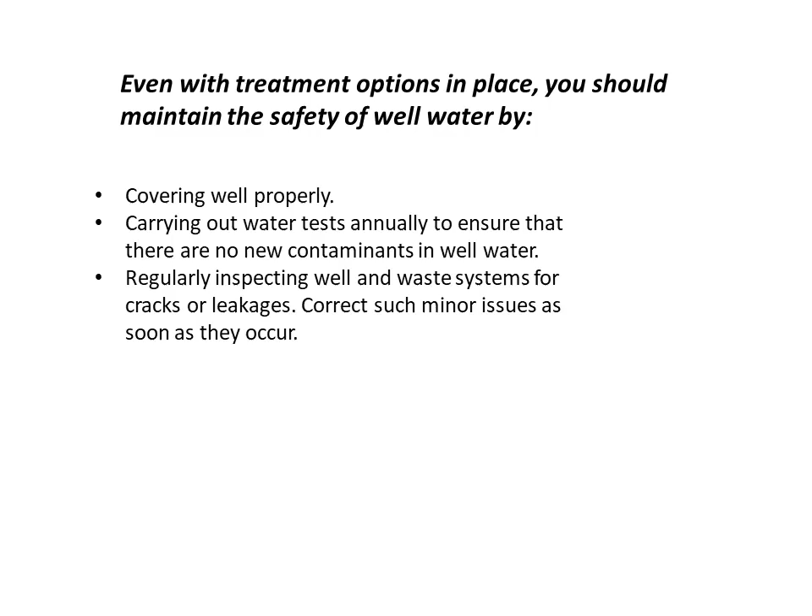This process is crucial after emergencies like floods, well damage or a positive bacteria test, requiring electrical safety, careful mixing and proper disposal of chlorinated water to protect the septic system. Even with treatment options in place, you should maintain the safety of the well water by covering the well properly, carrying out water tests annually to ensure that there are no new contaminants in the well water, and regularly inspecting the well and waste system for cracks or leakages. Correct such minor issues as soon as they occur.